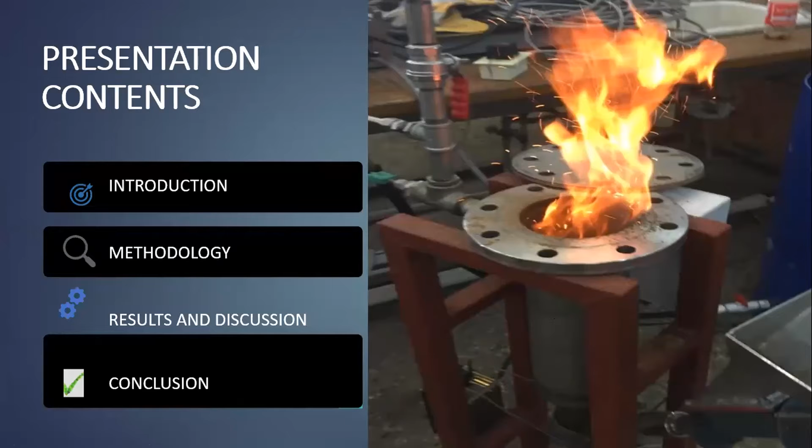Okay, good afternoon all. I will be presenting on the comparisons of coconut husk and other biomass waste for syngas production. My name's Anthony Adeyanju. The presentation contents will follow: introduction, methodology, results and discussion, and the conclusion.

The introduction, I will be presenting mainly on biomass waste conversion to energy. I'll be looking at biomass waste like coconut husk, bagasse, cocoa pod husk, and also sawdust. I will be looking at the comparisons of all these biomass waste in generating syngas.

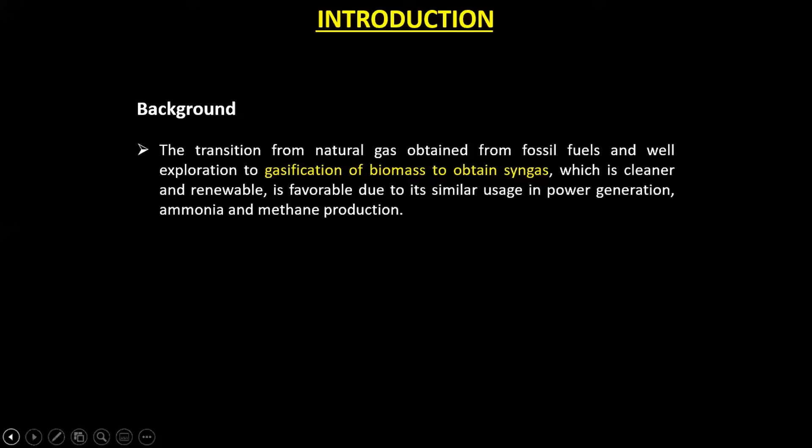The transition background: the transition from natural gas obtained from fossil fuels and well exploration to gasification of biomass to obtain syngas, which is cleaner and renewable, is favorable due to its similar usage in power generation, ammonia, and methane production.

So, biomass waste to energy. We can see that the conversion of biomass waste can be done in two methods: we can use the biochemical process, and we can also use the thermochemical process.

The biochemical process is accomplished through the breakdown of organic materials, as we can see in the diagram here, by organisms. The disadvantages of this process are: one, the high cost of catalyst; two, the extensive preconditioning of the feed; and three, the specific production of the product, for example, producing ethanol.

Then the thermochemical process, which is accomplished by heating the biomass to a temperature between 500 degrees Celsius to 850 degrees Celsius in the presence of air, oxygen, or steam, produces syngas. In the presence of oxygen, we call it gasification, whereas in the absence of oxygen, it is pyrolysis.

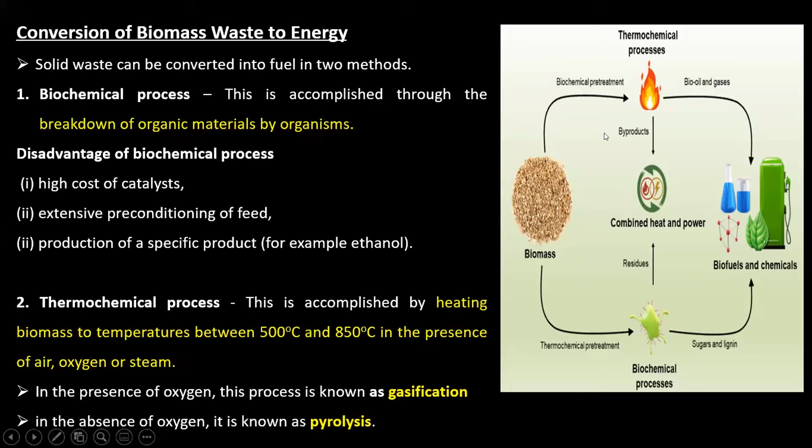Okay, so we have the syngas production now. Syngas is the resultant gas from biomass gasification, and it consists of carbon monoxide, hydrogen, carbon dioxide, and methane. The biomass is fed into the gasifier, and with heat supply to heat the bed at a rate of 500 to 850 degrees Celsius, you will produce the syngas. But the syngas still needs to pass through processes like scrubbing the oil and scrubbing the carbon dioxide. So the product is carbon monoxide, hydrogen, CO2, and CH4.

So the benefits of this syngas are: one, cheap cost of waste and the ability to recycle it. It is an incomplete combustion process that produces less carbon dioxide, that is, less greenhouse gas is produced.

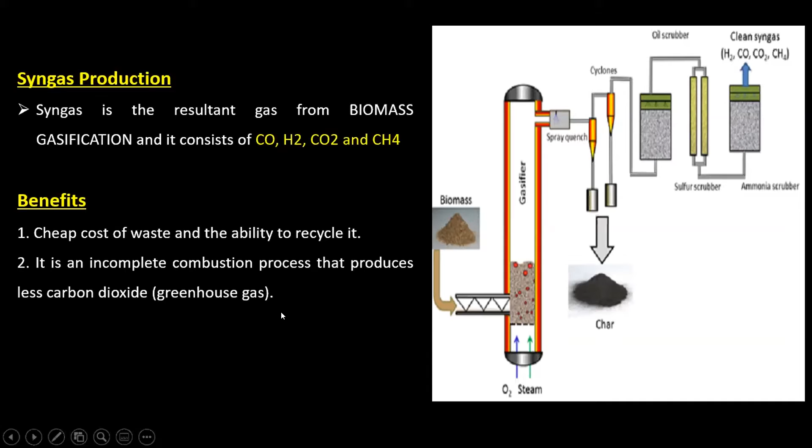Then we have the reactions that occur in this gasifier. The major reactions are: number one, drying, where the moisture present in the biomass is converted to steam. Then the second one is pyrolysis. Then the third one, oxidation, where at a temperature of 700 to 1400 degrees Celsius, the charcoal reacts with oxygen to produce carbon monoxide and heat. Then we have reduction, which occurs at high temperature where CO2, H2, and CH4 are formed in the resulting gas, known as syngas. So the chemical equation is: biomass plus O2 will form carbon monoxide plus H2 plus CO2 plus H2O plus CH4.

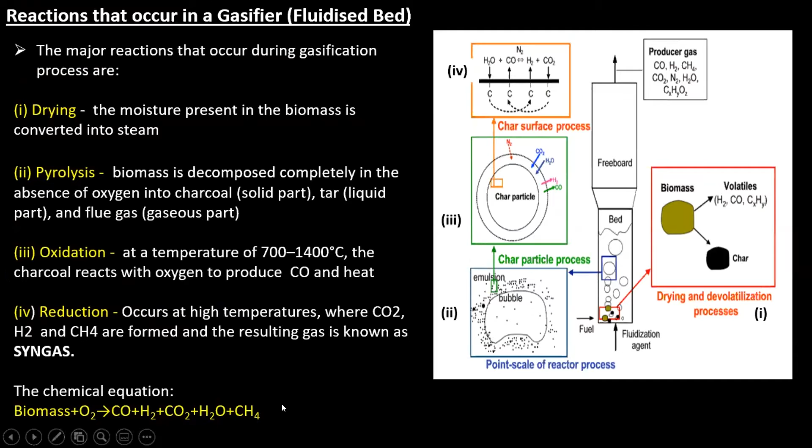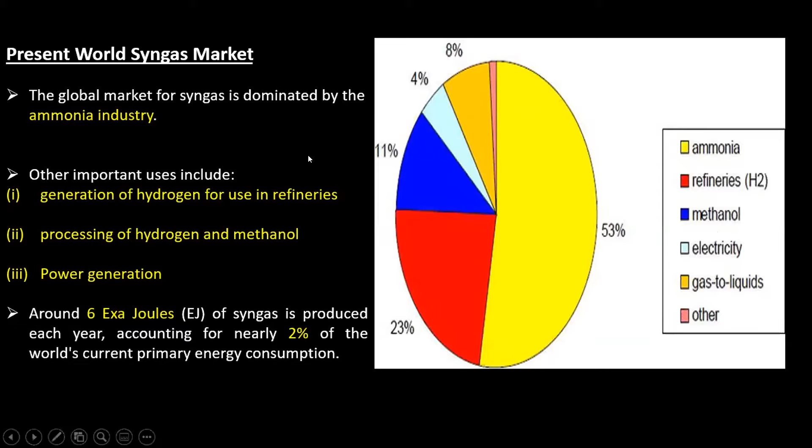Then we have the present world syngas market. The global market for syngas is dominated by the ammonia industry, which accounts for about 53% of the syngas industry. We have 23% for refineries, 11% for methanol, 4% for electricity generation, 8% for gas-to-liquids generation, and others. Other important uses include generation of hydrogen for use in refineries, processing of hydrogen, and methanol power generation. So these are the present world syngas markets.

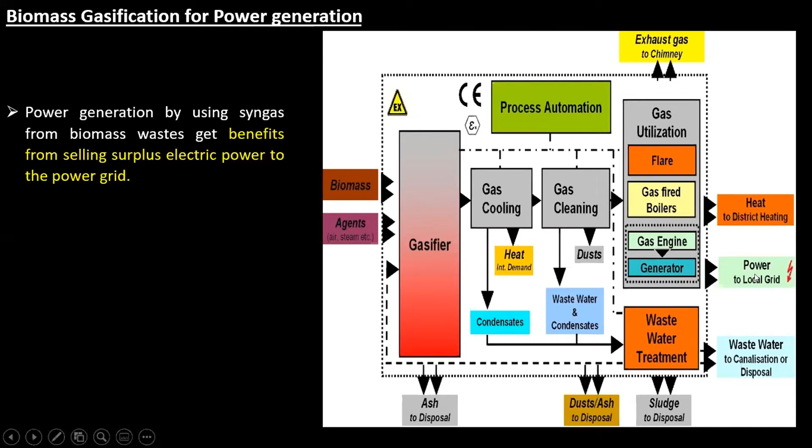So the power generation process using syngas from biomass gasification is as follows: the biomass enters into the gasifier, the gasifier combusts it, then we produce the syngas. We cool the syngas, then clean the syngas also. Then the syngas can enter gas-fired boilers to generate heat for district heating buildings, or we can use it to run a gas engine through a generator to produce power to the local grids. So that's the procedure for power generation using biomass gasification.

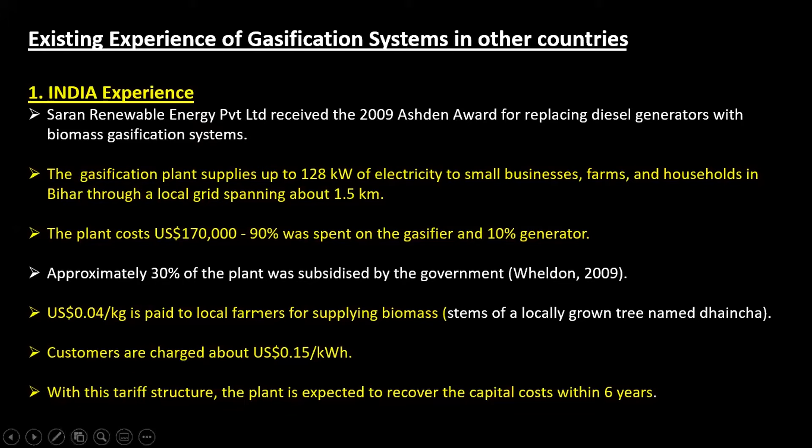Approximately 30% of the plant was subsidized by the government. US $0.04 per kilogram is paid to local farmers for supplying biomass, and the biomass used in that case is the tree stems of a tree known as dhaincha. That's what they use to generate the syngas. Customers are charged about US $0.15 per kilowatt hour for the electricity. So that is the India experience.

Then we have the Germany experience. Driven by the high prices of fossil fuels, about 50 wood gasifiers have been built and installed in Germany between 2000 and 2010. In 2008 alone, at least 25 gasifier plants with outputs ranging from 10 to 270 kilowatts were installed. The plant operators experience favorable conditions through guaranteed high energy feed-in tariffs of about 0.2 euro per kilowatt hour.

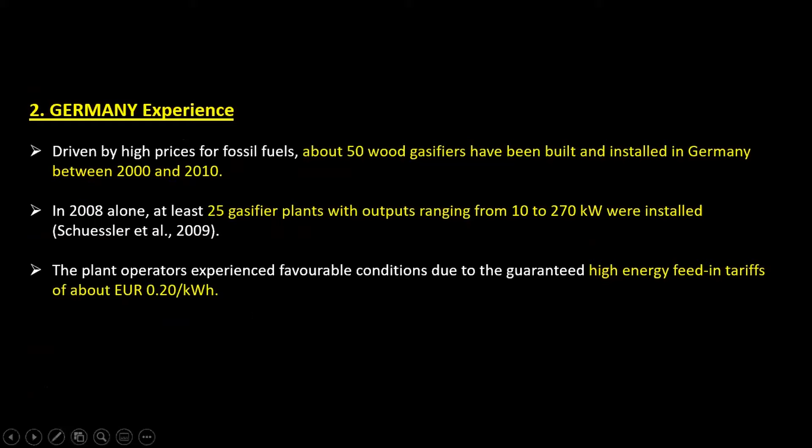Then we have the Madagascar experience, where the company called BIONERR installed 4 gasification units in Madagascar. The feedstocks used are rice husk and corn stalks. The gasification unit using rice husk has a power capacity of 40 kilowatts. The rice husk was collected from the rice mill in the village, about 2 tons per day. The residue was collected for free at the beginning, and later the farmers decided to sell it to the BIONERR company.

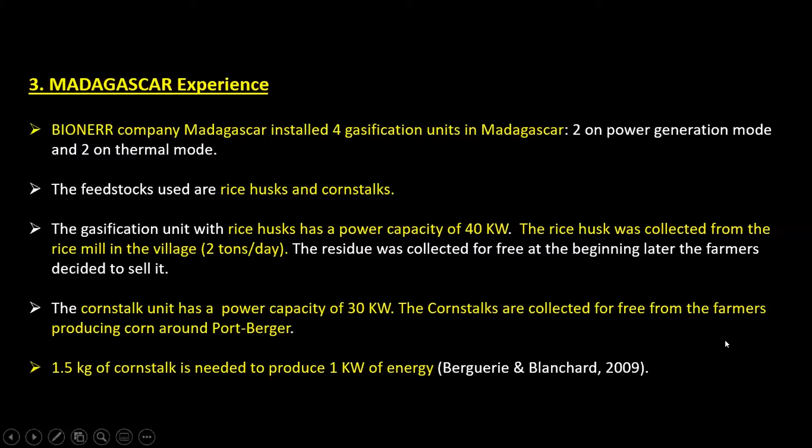The corn stalk also has a power capacity of 30 kilowatts, and the corn stalks are collected for free from the farmers after producing corn around the Port-Berger. So 1.5 kilogram of corn stalk is needed to produce 1 kilowatt of energy. That's for the Madagascar experience.

Then we have the methodology now we use for this particular syngas production. The samples used are sawdust, cocoa pod husk, coconut husk, and bagasse. We are discussing the coconut husk mainly, but I made comparisons between the cocoa pod husk, bagasse, coconut husk, and sawdust, so as to know the energy generation per sample.

The cocoa pod husk is a byproduct of the cocoa industry produced after the cocoa beans have been removed from the fruit. The pod husk accounts for 52 to 76% of the weight of the cocoa fruit. 10 tons of cocoa pod husk are produced for every ton of dry beans produced, which is a major problem for waste management.

Then we have bagasse, a dry pulpy residue left behind after sugar cane juice is extracted. Then we have coconut husk, which contains cellulose, lignin, pyroligneous acid, gas, charcoal, tar, tannin, and potassium in its chemical characteristics. Coconut husks are mostly used in direct combustion to produce charcoal. Otherwise they are just discarded.

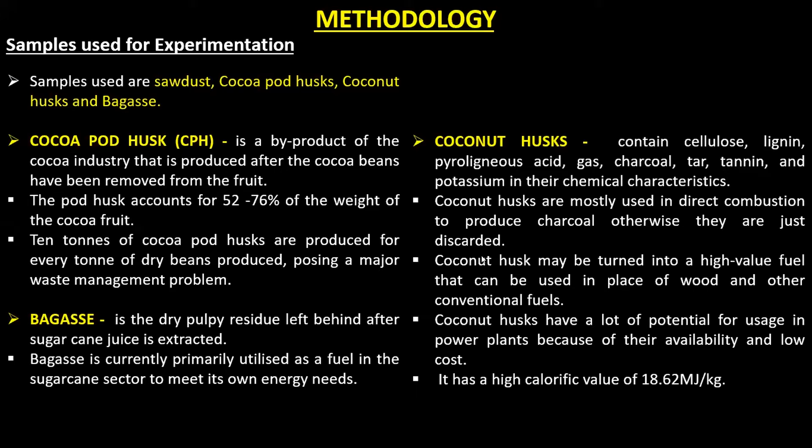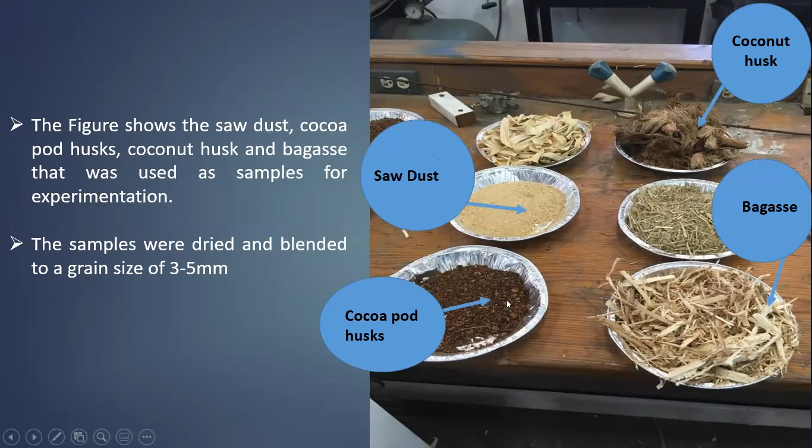Then we have the samples. The figures here show the samples like this: sawdust, cocoa pod husk, coconut husk, and bagasse. All these are grinded, after well dried, and blended to a grain size of 3 to 5 millimeter, before we started inserting them inside the gasifier.

The proximate and ultimate analysis of the samples were also performed. The proximate analysis was performed to determine the moisture content, ash content, volatile matter content, and fixed carbon content for sawdust, coconut husk, cocoa pod husk, and bagasse. Then we also carried out the ultimate analysis to know the caloric value and the carbon, hydrogen, oxygen, nitrogen, sulfur content composition in those samples.

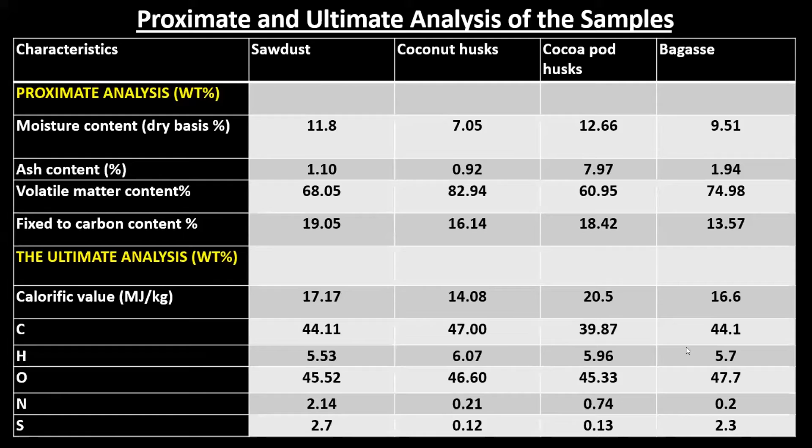This diagram we are seeing here shows the prototype of the fluidised bed gasifier. This is the fabrication process that was taking place in the workshop at UWI.

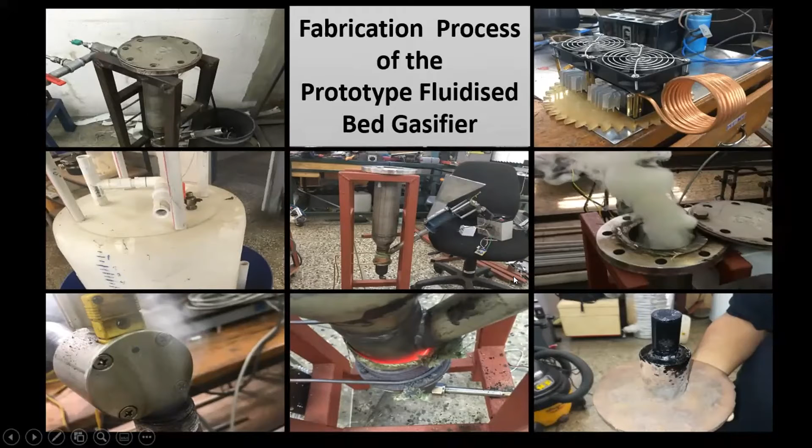Each step was repeated using a silicon dioxide and nickel catalyst, to be able to know the effect of catalyst on those samples in producing the syngas. We used a gas analyzer, taking readings at a 7-minute interval. The procedures were repeated for all the samples. So those are the experimental setup.

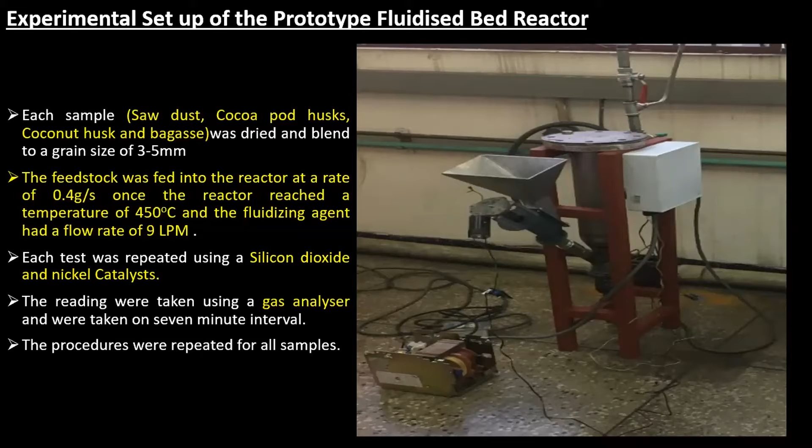Then we have the properties of syngas produced from gasification of samples without catalyst. The properties - efficiency, carbon monoxide, nitrogen oxide in ppm, hydrocarbon produced, carbon dioxide produced, and air fuel ratio - were taken for sawdust, cocoa pod husk, bagasse, and coconut husk. So we look at that for when there's no catalyst.

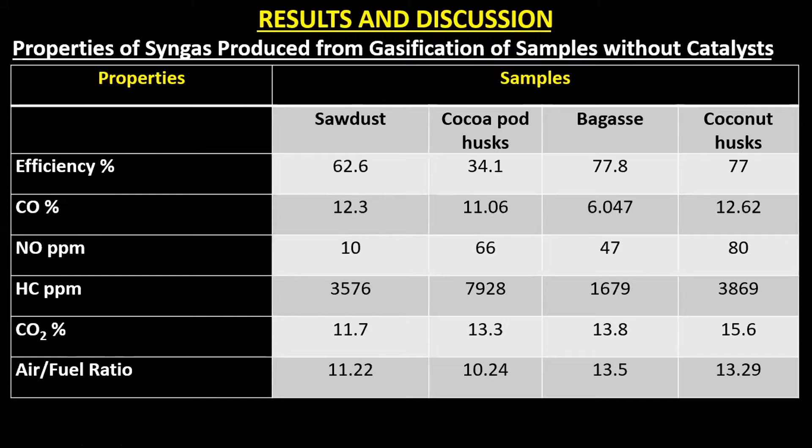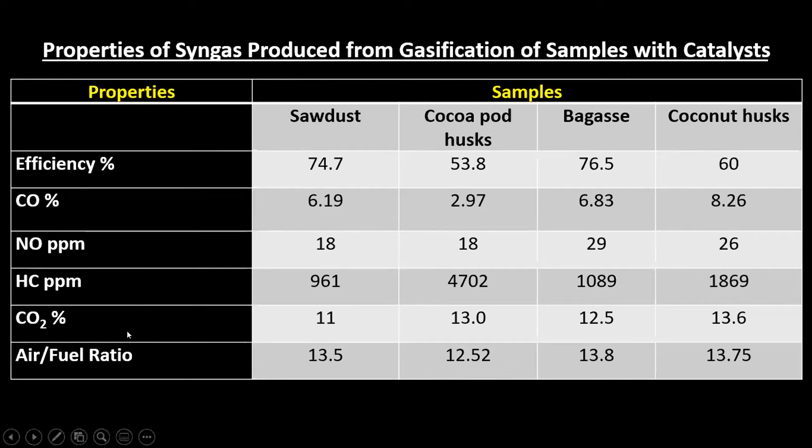Then the second one was also looking at when with catalyst, with nickel and silicon dioxide catalyst. We also took the properties for the efficiency, carbon monoxide, nitrogen oxide, hydrocarbon, carbon dioxide, and air fuel ratio for the samples also. So we can see from here, this is the syngas produced from the samples.

After the gasifier, we have the flame generated from the syngas after testing. This flame is not explosive because the fuel to air ratio is about 10% to 13.8%, whereas the lower flammability limit for gasoline is about 1.4%, and for CNG is about 5%. For this syngas, the range is between 10% and 13.8%, which is not explosive.

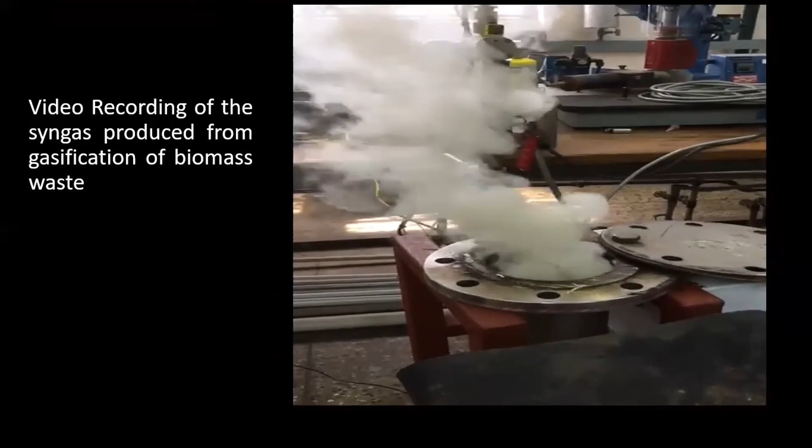The next slide shows the gas produced, the syngas produced from this experimentation. Now we look at the composition of that syngas.

When we consider without catalyst the hydrocarbon generated for each sample—sawdust, cocoa pod husk, bagasse, and coconut husk—we see that about 7928 ppm was generated by cocoa pod husk, and 3869 ppm by coconut husk. Then 3576 ppm was generated by sawdust, and 1679 ppm by bagasse. Comparing this with existing sawdust data, we see that coconut husk production is even higher than sawdust. This means coconut husk, cocoa pod husk, and bagasse can also be used for syngas production. That is the amount of hydrocarbon produced.

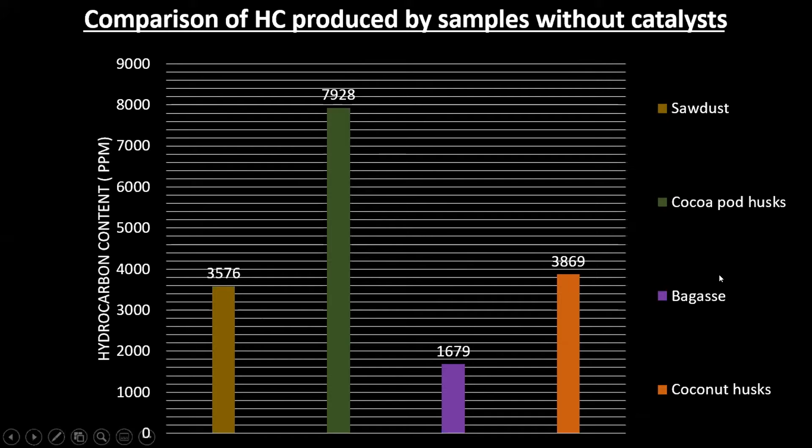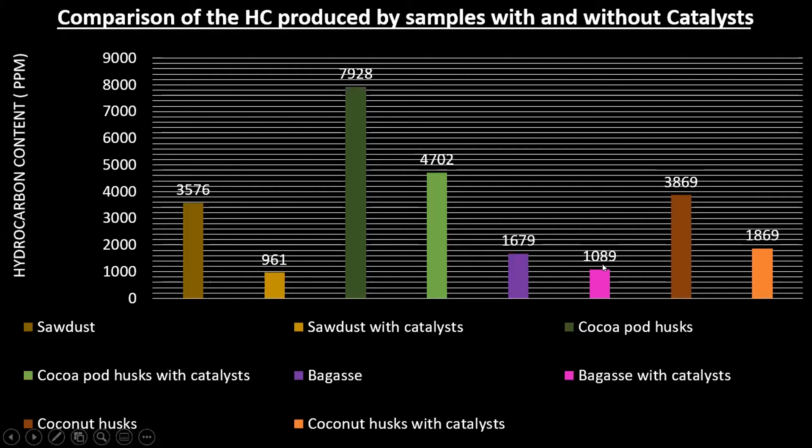Now we compare the HC content for the hydrocarbon produced when adding the catalyst. Adding catalyst reduces hydrocarbon production. For example, catalyst reduces coconut husk from 3869 ppm to 1869 ppm, cocoa pod husk from 7928 ppm to 4702 ppm, sawdust from 3576 ppm to 961 ppm, and bagasse from 1679 ppm to 1089 ppm. That is when the catalyst is included.

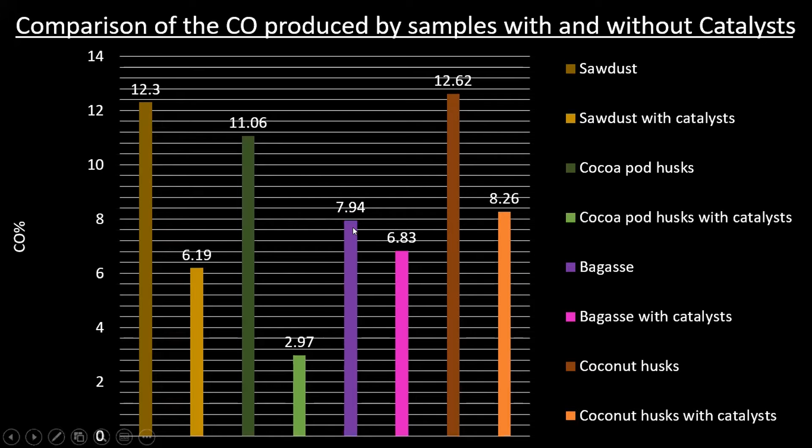Now we look at the carbon monoxide production from these samples. We see the highest production of carbon monoxide from coconut husk, which can be reduced when we add catalyst, from 12.62% to 8.26%. This means the catalyst reduces the amount of carbon monoxide produced. The same applies to sawdust, from 12.3% to 6.19%, cocoa pod husk from 11.06% to 2.97%, and bagasse from 7.94% to 6.83%.

Now we look at the amount of carbon dioxide produced, which ranges from 11% to 15.6%. From the literature, carbon dioxide produced for syngas ranges from 5% to over 16%, so our results are still within the expected range. The effect of catalyst is also felt in carbon dioxide production. For example, coconut husk produced 15.6% carbon dioxide, which reduced to 13.6% with catalyst added. Similarly, bagasse produced 13.8% carbon dioxide, reduced to 12.5% with catalyst. So there's a great effect of catalyst on the carbon dioxide composition of syngas production.

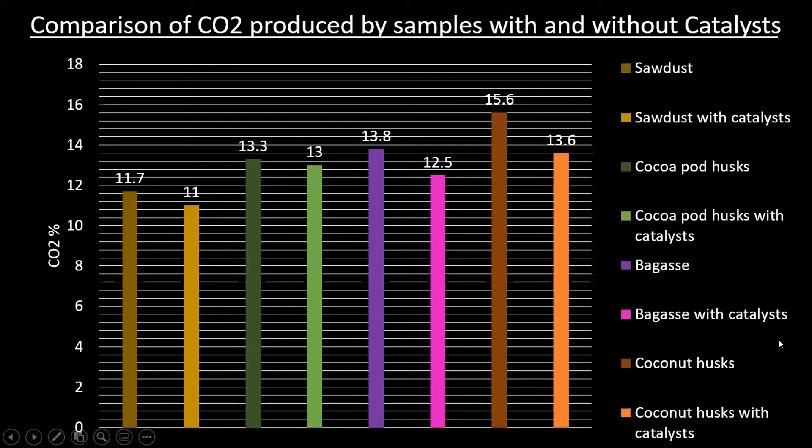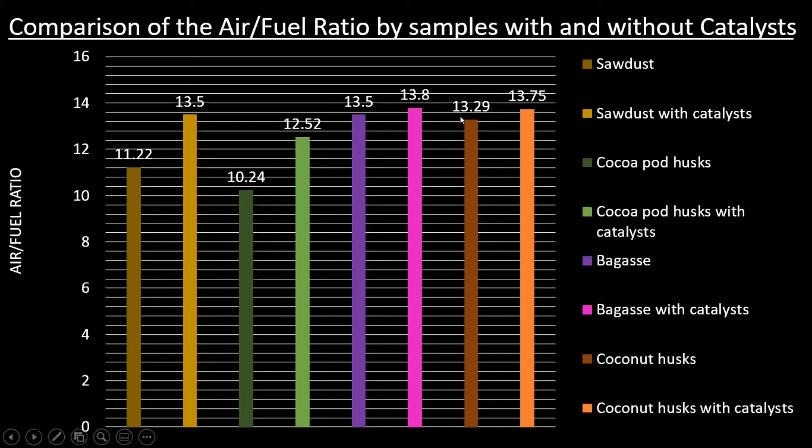We also looked at the air to fuel ratio of the samples, which ranges from 10.24% to 13.8%. Without catalyst, we have 10.24% for cocoa pod husk, and 12.52% with catalyst added. The highest air to fuel ratio is 13.8% for bagasse with catalyst. For coconut husk, we have 13.75% with catalyst, whereas 13.29% without catalyst.

From this, we reach the conclusion that the comparison of biomass waste and the effect of catalyst on syngas production were examined in the study. Due to their high volatile matter and cellulose content, as well as low moisture content, the samples—sawdust, coconut husk, cocoa pod husk, and bagasse—were found appropriate for syngas generation. Cocoa pod husk without catalyst had the greatest hydrocarbon content at 7928 ppm, while bagasse had the lowest at 1679 ppm. Sawdust and coconut husk generated 3576 ppm and 3869 ppm respectively. The catalyst prevents the production of tar and other heavy hydrocarbons. The lower flammability level of syngas is higher compared to CNG, where CNG is 5% and gasoline is 1.4%.

Gasoline is explosive when mixed with atmospheric air, flowing in the air. But the syngas produced from this study has a lower flammability range of 10.24 to 13.8%. The hydrocarbon's highest value was determined to have a lower explosive limit of 0.8%. That means this value was enough to ignite a flame in testing, but it was well beyond the range of any possible candidates to be deemed explosive.

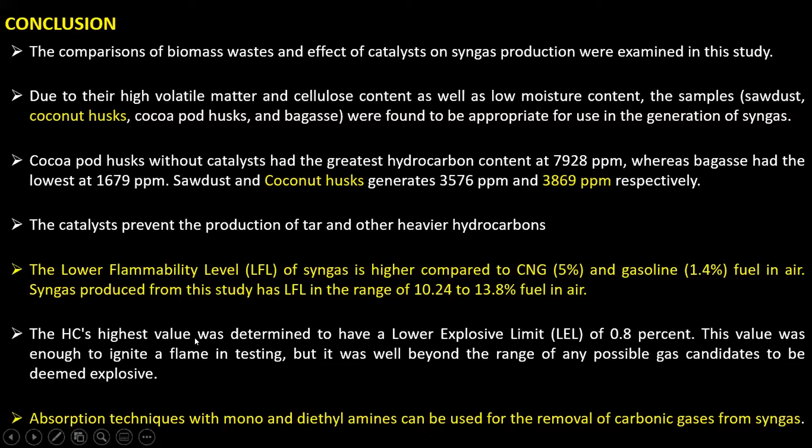The conditions for operating gasification plants are: one, high and constant availability of cheap, appropriate biomass fuel is required. Two, availability of an experienced manufacturer. Three, continuous availability of specialized know-how for maintenance and operation that is not financed through operational profit, and low labor cost. So those are the requirements for a gasification plant.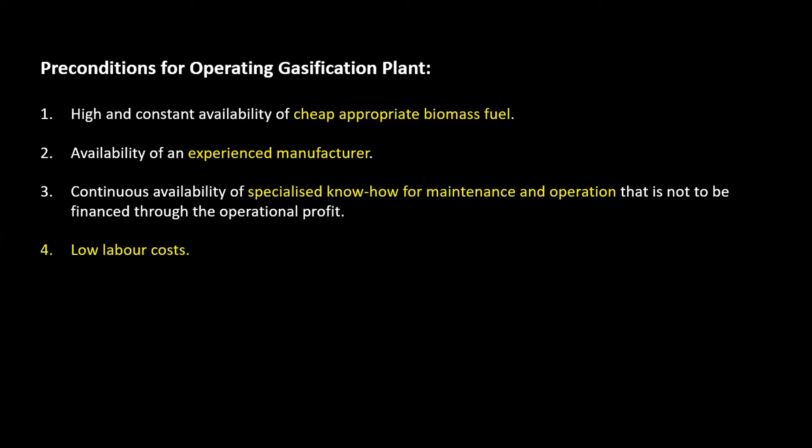Thank you. That's it for me.

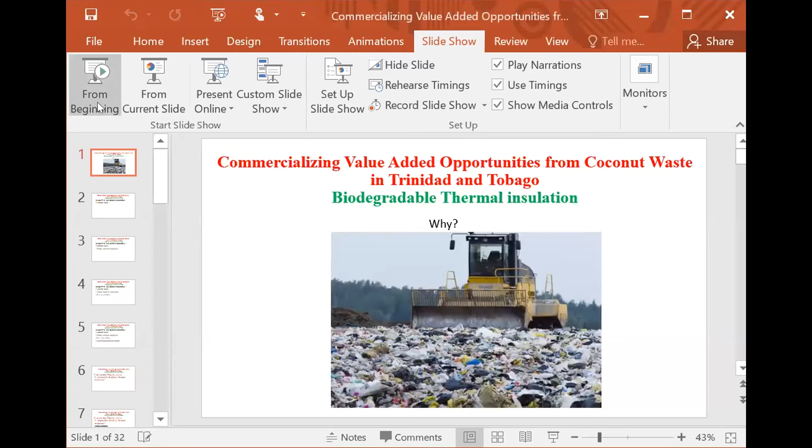So today we are looking at commercializing coconut waste, and as presenters before said, we should not really be calling it waste. We're going to look at this in the aspect of using it as thermal insulation.

So first I'm going to address the concern as to why. Why should we be looking at thermal insulation that is biodegradable?

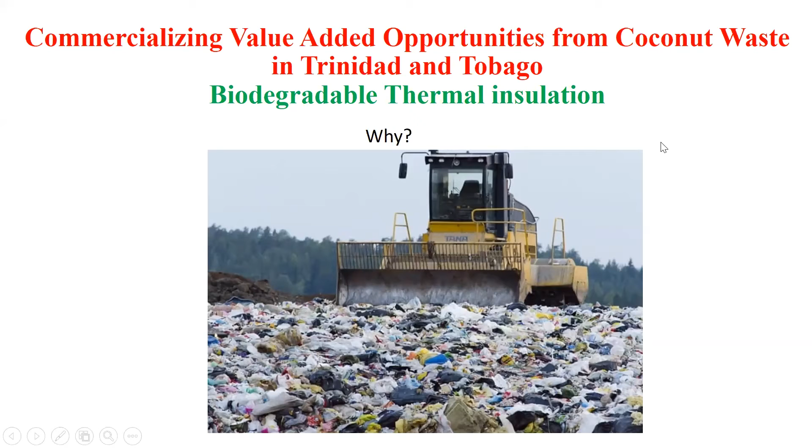From this picture here, you get a feel of what kind of waste is generated, a lot of it from the construction industry. The problems faced when we have retrofitting, refurbishing, reconstructing of existing structures—one of the major problems is disposal. The man-made non-biodegradable materials, such as polystyrene, polyurethane, polypropylene, fiberglass, etc. that we are accustomed with, pose a big problem for disposal.

In fact, in 2021, a publication by the Construction Research Center in Canada indicated that despite the advantages of polymeric products in the construction sector, there are several challenges to their use, and one is disposal.

Another issue with existing building thermal insulation is the high energy intensive production. These materials use a lot of energy in their production, giving a very high carbon footprint compared to other construction materials such as stone, bricks, concrete, etc.

For example, making fiberglass insulation is an energy intensive process, up to about 10 times more than eco-friendly processes.

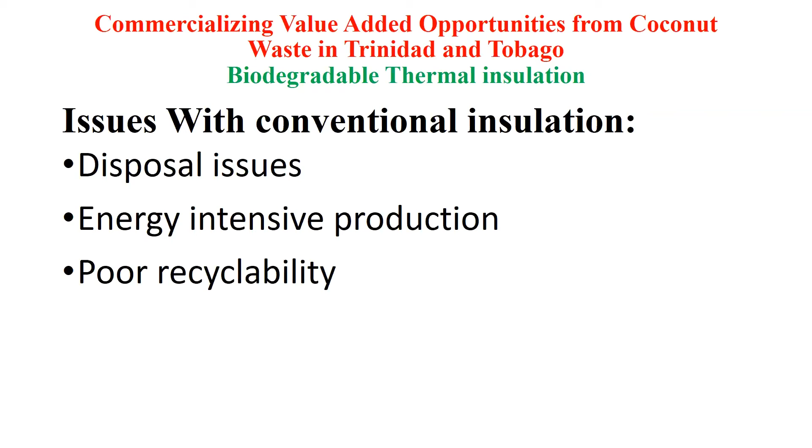Another issue is poor recyclability. These non-biodegradable materials take a very long time to decay when put in landfills. They also lead to health hazards because they have toxic chemicals in them, for example the flame retardants that are very toxic. When these toxic chemicals leak into the landfills, they poison the environment, leaking into the water courses, etc. So it is a very challenging situation.

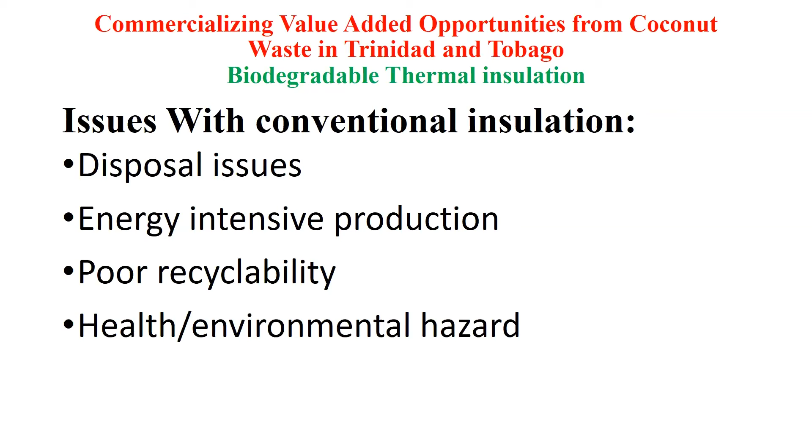Presently, there is a drive towards moving to more biodegradable, environmentally friendly alternatives. Now the question: can coconut fiber be used as biodegradable building thermal insulation? I'm going to examine that in the next couple of slides.

To be a building thermal insulation, the material must have certain properties and certain characteristics. So we're going to now look at the properties and characteristics of coconut fiber.

The first one is biodegradable. When we say biodegradable, in this sense, this term would refer to a material that occurs naturally, and when disposed, will decompose without causing any adverse effect on the environment. I'm sure you will agree that coconut fiber would fall and fit this description. So one, it's biodegradable.

Another property of building thermal insulation is that it should be fibrous. Think of fiberglass. The fibrous material breaks up the air pockets, reducing convective heat transfer and therefore making it an insulator.

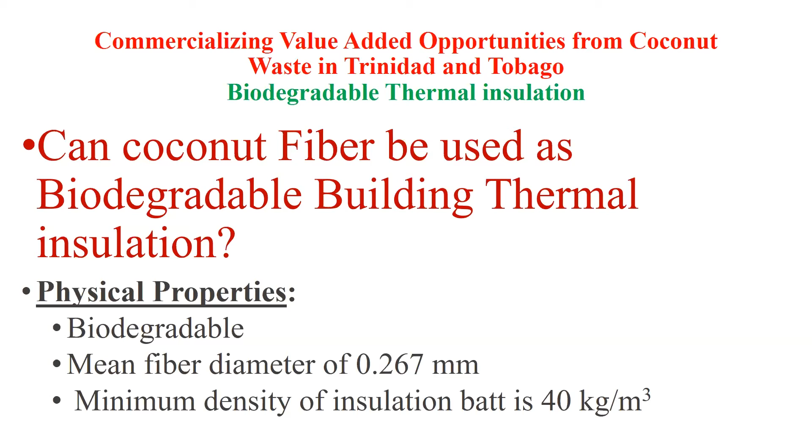But the main thing about thermal insulation is the thermal conductivity. Do coconut fibers satisfy this requirement to be used as a building thermal insulation?

Thermal conductivity measurements were conducted in accordance with the ASTM C518 standard. The apparent thermal conductivity, symbol lambda, was measured with the LaserComp FOX 304 apparatus. These measurements were under steady state, one-dimensional test condition with heat flow upwards.

Now, this test equipment is one of the most accurate methods for measuring thermal conductivity. The LaserComp FOX 304 used a...

a 305 millimeter square test specimen. And the results here, the test equipment provided that lambda with plus or minus 0.2% repeatability and plus or minus 0.5% reproducibility.

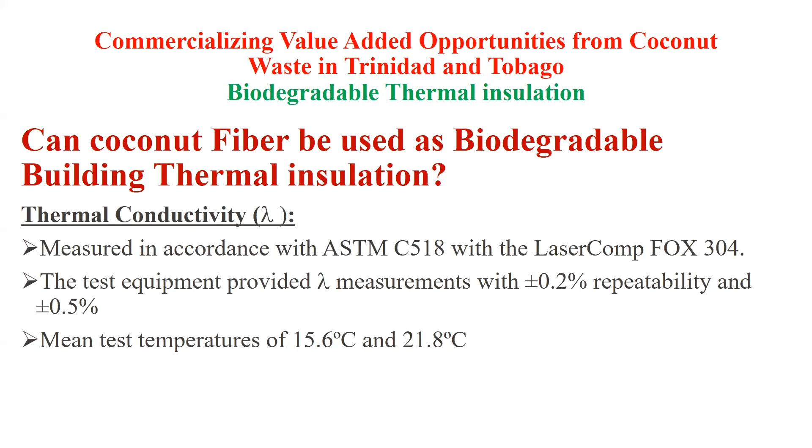A question may arise: why these sort of odd temperatures and not something close to what we have in Trinidad or the Caribbean? Well, you see, our buildings here, as you know, are not really thermally insulated. We don't need it. The point here is that we're looking at thermal insulation for the countries that experience a cool climate.

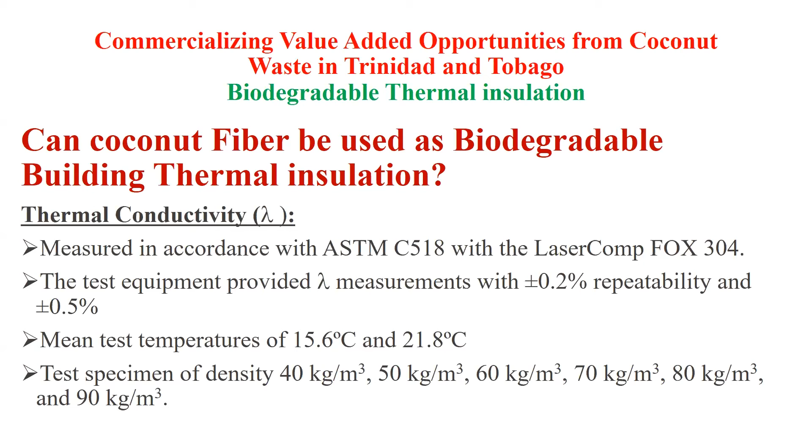Now, the test specimens were arranged from the lowest density that it can exist, which is 40 kilograms per meter cube, existing naturally without settling, up to 90 kilograms per meter cube. Tests were conducted, and for each sample at least 3 tests were done, and the mean test results are shown here on this table.

So the average of the 3 tests for the 40 up to 90 kilograms per meter cube density specimens, at the mean test temperature of 15.6 degrees C and 21.8 degrees C, are reflected on this table.

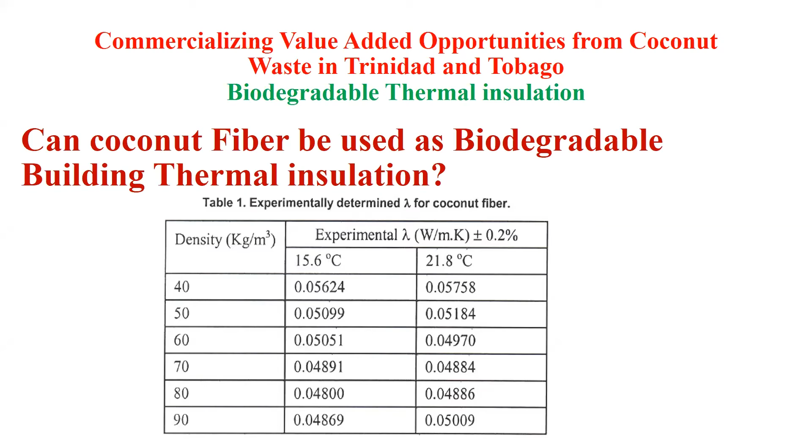Now, those of you who scan it quickly would see that it dips and then goes back up. Now, that is very important. One, the thermal conductivity...

falls within the range of 0.03 to 0.06 watt per meter Kelvin. This range is normally associated with building thermal insulation. So, one tick mark, yes, coconut fiber can be used as building thermal insulation.

Another characteristic feature from the experimental results for coconut fiber shown on the table is the general trend associated with loose fill thermal insulation: as density increases from the minimum possible value, the thermal conductivity decreases to a minimum, the optimum value, then increases if density is increased further. The density range tested stopped at 90 because I achieved the minimum density that would give the minimum thermal conductivity at that optimum density. That is what you want for thermal insulation, the lowest apparent thermal conductivity. So coconut fiber satisfies that condition.

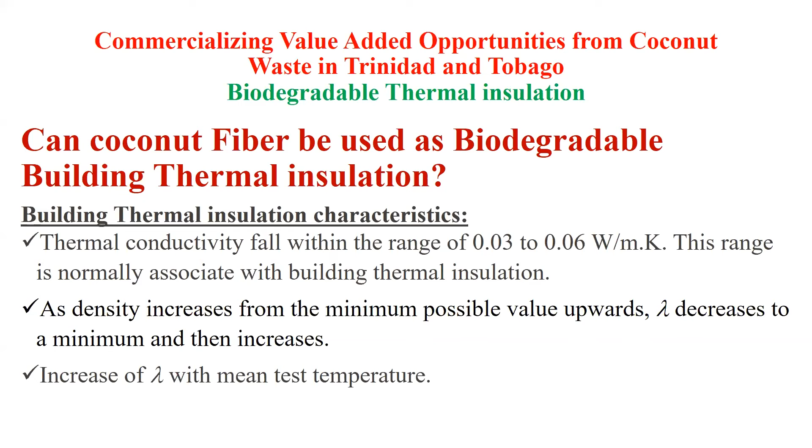Now the question: how does the thermal conductivity of coconut fiber insulation batt compare with existing or traditionally used building thermal insulation? Here on this graph is a comparison with traditional glass fiber and so on. You would see that coconut fiber, and I also tested sugarcane fiber, show higher apparent thermal conductivity than, for example, polystyrene and glass fiber.

But bear in mind this scale is very fine - we're looking at 0.03, 0.04, 0.05, 0.06. So it's very fine. The minimum thermal conductivity at the optimum density is well within the range used for building thermal insulation. So from this comparison, yes, coconut fiber can be used as building thermal insulation.

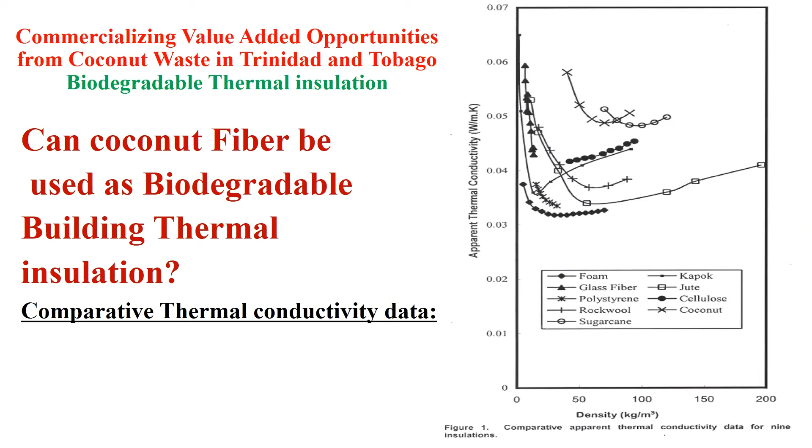Now, how far have we reached into making this a reality? Since we're talking about coconut, I'd like to use the example of a plant. My question: do we have the seed for this idea to mushroom, blossom and bear fruit? In this case, I'm looking at the seed as being the scientific research and data showing coconut fiber has the characteristics and properties for use as building thermal insulation.

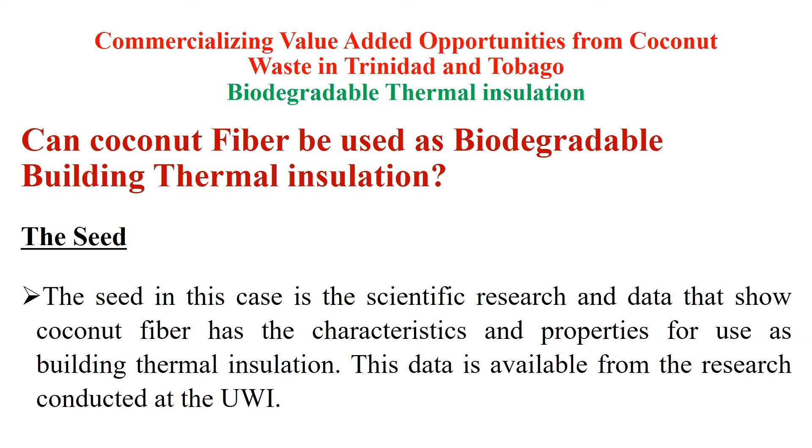And that has been established. This data is available from the research I did at UWI. So I think we have the seed. But as you would all know, having a seed and getting fruits is a very big jump, because after you have the seed, you would need some soil and water.

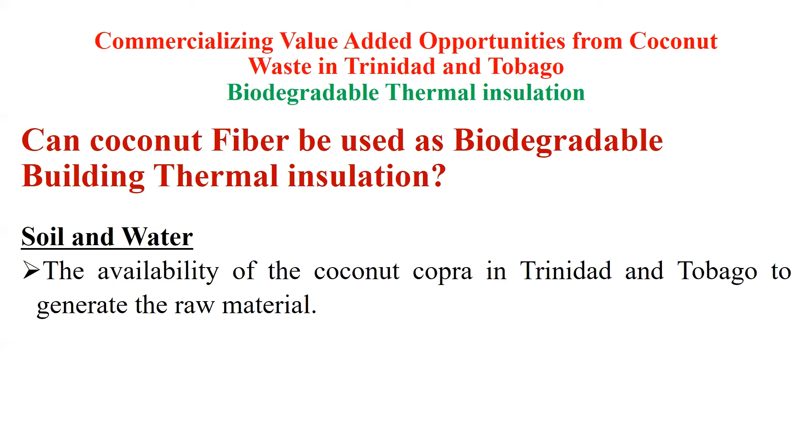Do we have the soil and water? Well, the availability of the copra in Trinidad and Tobago to generate that raw material can be compared to the soil and water. Do we have the technology to do it? Well, I think Mr. Thompson was referring to some equipment, and we have the technology.

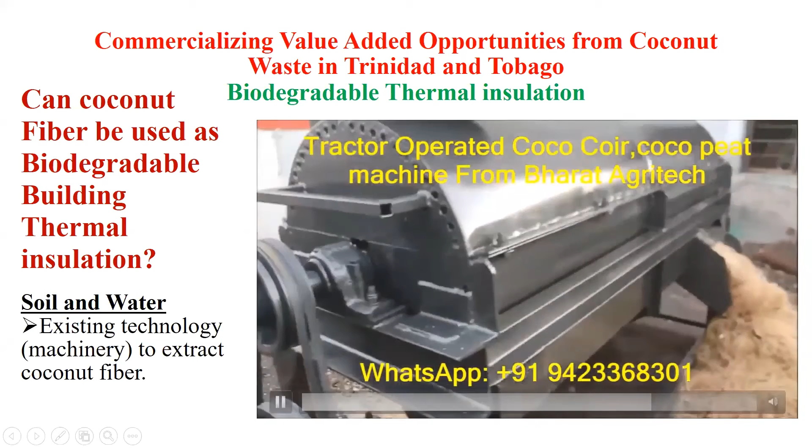Yes, so the technology exists. This is a very small scale machine, but there are also large scale machines. So there is no need to reinvent the wheel - that technology exists.

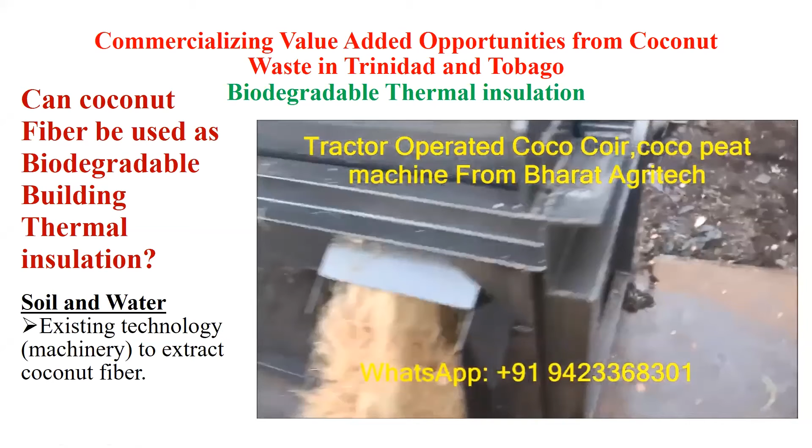What else exists? Can we make the extracted fiber, the unprocessed coconut fiber, into insulation batt? Yes, that technology exists too - you just have to buy the machinery. So again, no need to reinvent the wheel.

So we have the seed, we have the soil, we have the water. But that's not all you need for that plant to grow and bear fruit. We need some more things - of course you need sunlight. Are there any rays of sunlight for this coconut fiber to be used as building thermal insulation?

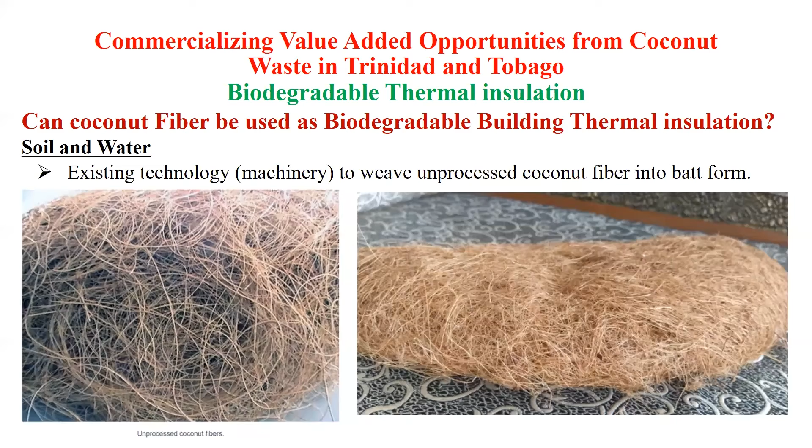Well, let's take a look. In this picture, this is an article published in phys.org on the 7th of March, 2019. We see Professor Walker and Dr. Platt here holding up an example of the research they are doing.

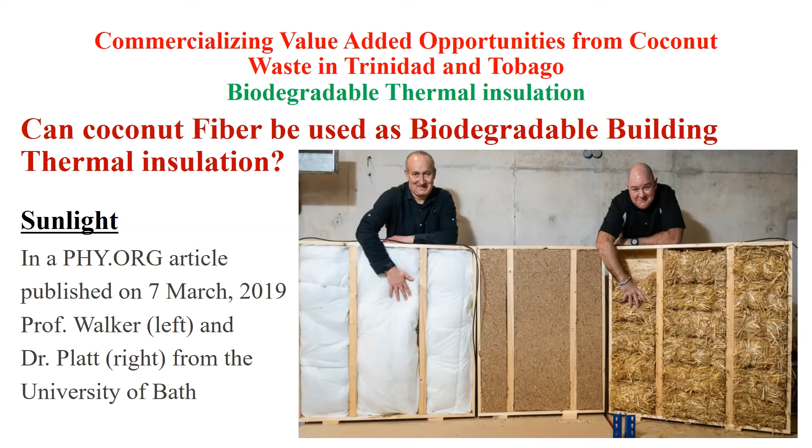So they are busy trying to get alternative, biodegradable building thermal insulation. Now the idea of using existing materials or co-products could lead to significant reduction in emissions associated with natural resources used in the manufacture of traditional energy-intensive insulations such as glass wool and rock wool.

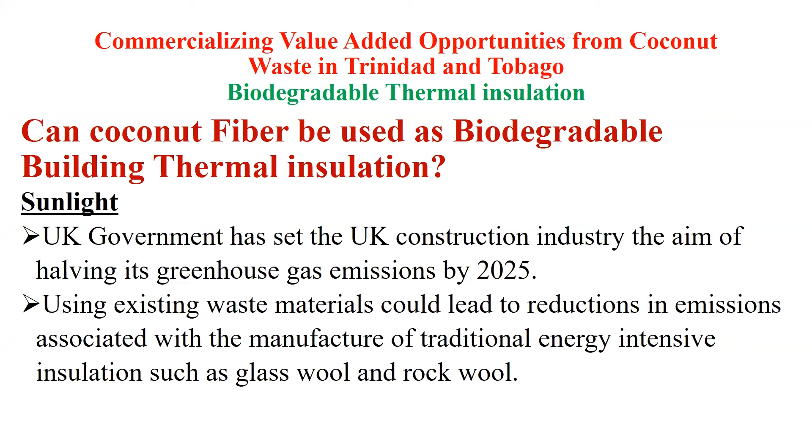So the question: can we capitalize on these mushrooming markets for natural, biodegradable thermal insulation, such as coconut fiber? I would like to classify this as some sunshine. So we have some sunshine now. We have the seed, we have the soil, we have the water, and we're seeing that there is some sunshine. How about the space to grow?

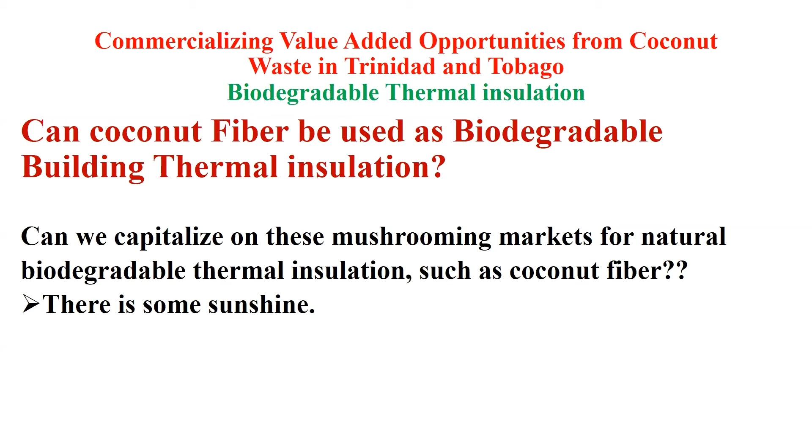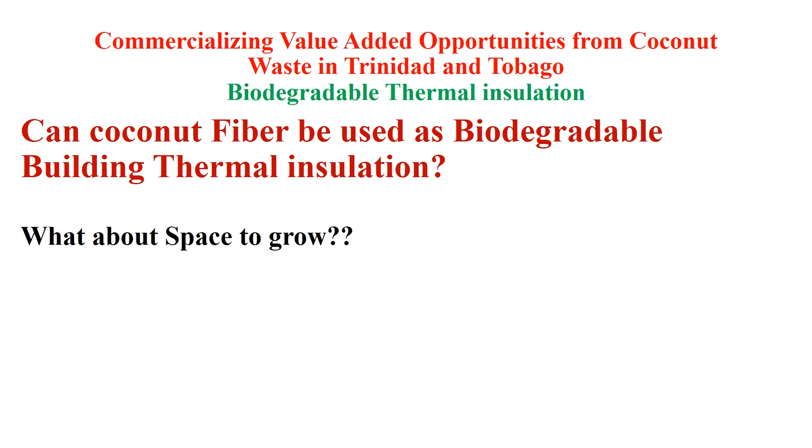And mushroom and bear fruits. So you see, for this initiative to succeed and to get off the research phase from the lab, we need a lot more.

And I'm getting the idea from this webinar that there is hope. We'll need funding to develop the final product from this research phase. Mr. Thompson gave an idea of the cost of that kind of machinery and the cost of funding to go from research to a final commercial product to hold in hand and say, hey, look, this is what we have.

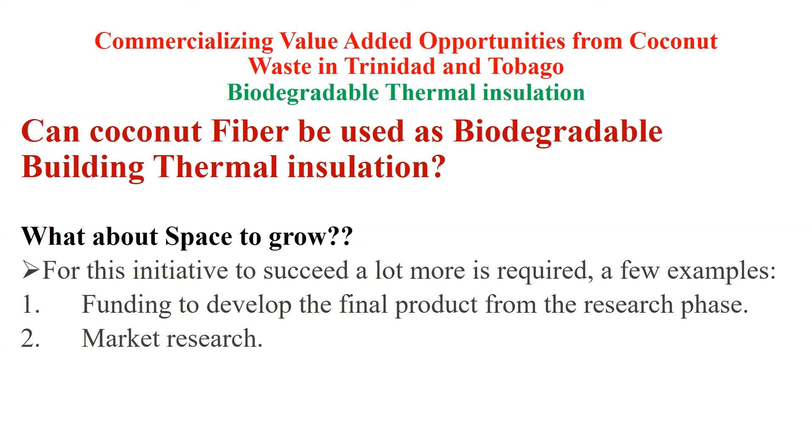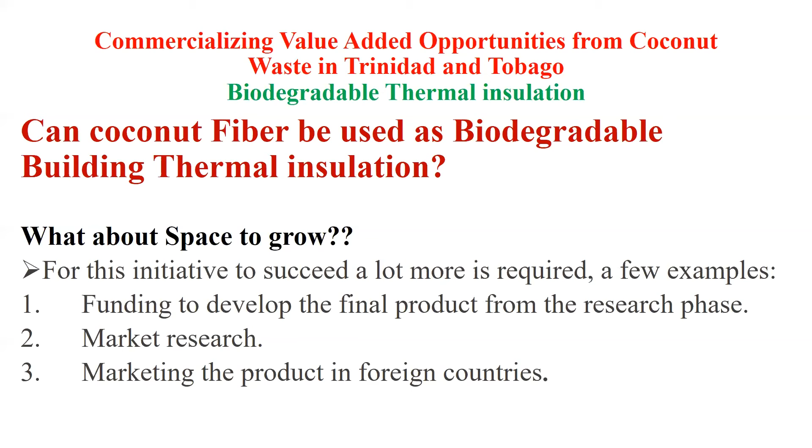Then that still won't give you fruits. We need to do market research, and we need to really market these products in the foreign countries, because thermal insulation in Trinidad will be a no-no. Building thermal insulation, that is. So this is a foreign exchange earner, marketing these products in the foreign countries. So a lot of help is needed, because this is now outside the reach of the engineers at the mechanical department. This is a different expertise, and we would need help in that aspect to get the fruits for the country.

So thank you all for joining and giving me this opportunity to make this presentation. Thanks. Back to you, Chair.

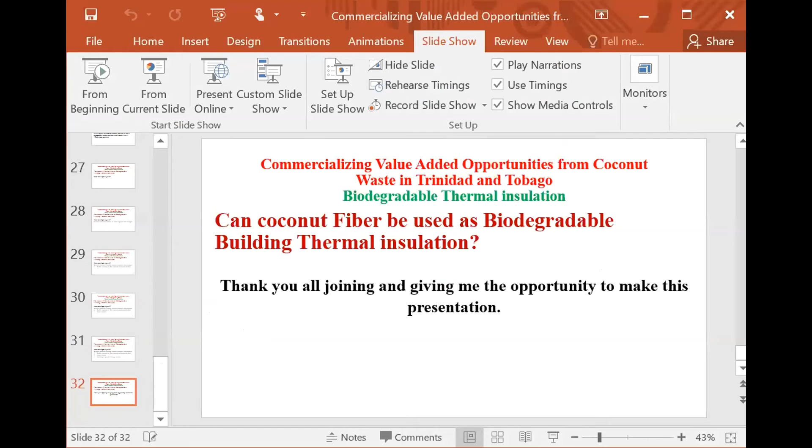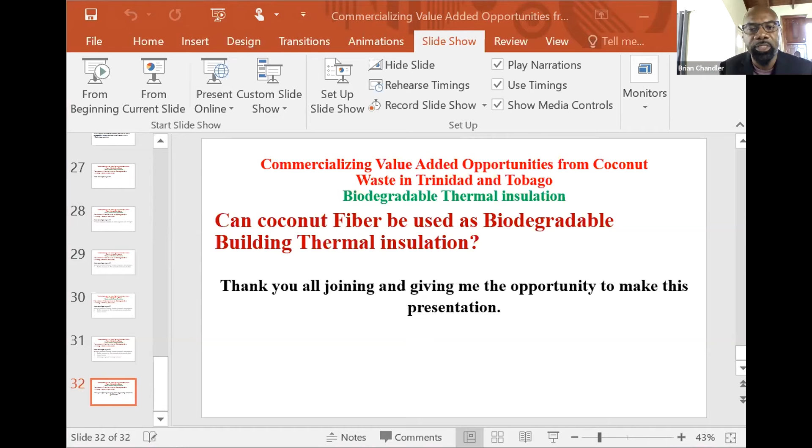Thank you very much, Dr. Krishpersad Manohar. That was a fantastic presentation. It actually piqued my interest at the potential that we can have in the Caribbean, especially with regards to energy efficiency, insulation, all against the whole, well, the recent Paris and COP26 meeting, where it shows that we are going to have extreme weather conditions. This is something that has great potential for not only the Caribbean, but the rest of the world. So with that being said, I open up the question and answer segment so that the viewers can have some sort of interaction with the presenters and encourage some sort of invigorated conversation to yield further explanations and to go deeper into these two areas of concern. The floor is open to everyone at this point in time.

Okay, so we have a question for Dr. Adeyanju. Is anyone in Trinidad using this technology? Is it feasible in light of inexpensive electricity availability from natural gas? That's one question.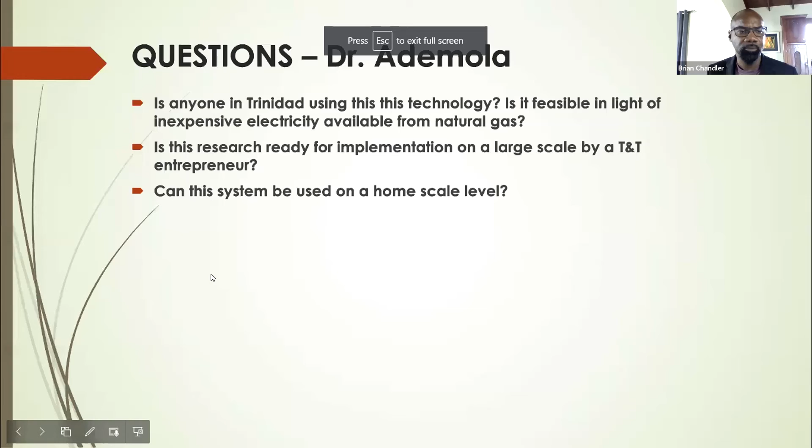Okay. Thank you. Any other questions from the audience? There's another. Okay, Dr. Ademola again. There's one more question. Can this system be used at home, say at the home level?

I think yes, I think it can be used on a home scale level for us to produce methane. Because syngas is also the result of, I mean, the composition of syngas is of methane, carbon dioxide, carbon monoxide, and hydrogen. So if the hydrogen, carbon monoxide, carbon dioxide are scrubbed using ethylamine solution, then you can be left with methane, which can be used for cooking.

Okay. That's very good question. Yeah, this is a very good answer. Thanks a lot. Any other question?

Okay, this one goes to Dr. Manohar. Does breed or variety make a difference in thermal conductivity? Basically, which variety is best all around? So they're basically asking what variety of coconut is best to be used. Okay, thank you, Chair. You're welcome.

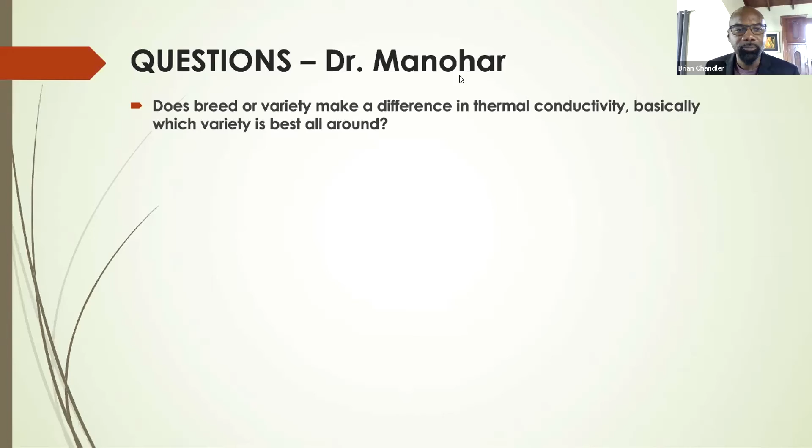Sure. In reference to the work that CROSQ would have been doing with labeling and energy efficiency, and this is a regional project, how do you see this particular product being labeled and recognized as a standard for the Caribbean?

This product is looked at for energy savings, because when you insulate your building in the summertime - as you know, in Trinidad we don't have insulation in our walls. If you live, say, in North America, you would insulate your building. That would save you a tremendous amount on your electricity bill for cooling. So it is saving, and of course all that will tie back. I don't know if I'm getting your question correct, but it will tie back into saving electricity, greenhouse gas emissions, and so on. You can trace it all back with all the talk that's out there.

It does speak largely to it because it's all about improving energy efficiencies. That one in particular was focused on labeling for the importation of, say, refrigerators, and those things that are energy efficient, to promote renewable energy uptake. So I see this largely as something that will contribute to that.

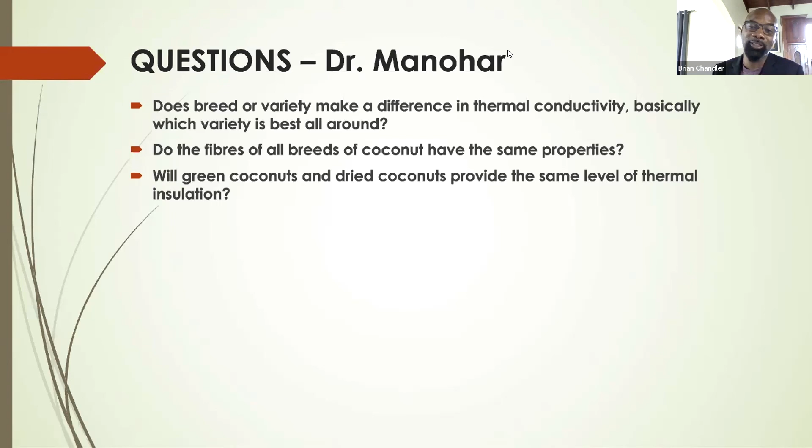Any other questions, audience? This is a very interesting area for us as a Caribbean people, seeing that we are troubled by hurricanes and storms, and there's rising temperatures. I don't see 1.5 as realistic. Prime Minister Mia Mottley did make mention that it's unrealistic - she sees it as much of a higher value. So this type of intervention I see as a means for us to be more sustainable and resilient.

Anyone else have anything to contribute to this particular area? Brian, I just want to ask Dr. Ademola - in terms of what would you say is the minimum amount of tons of fiber we would need to generate a minimum amount of energy on a home usage basis? Thanks.